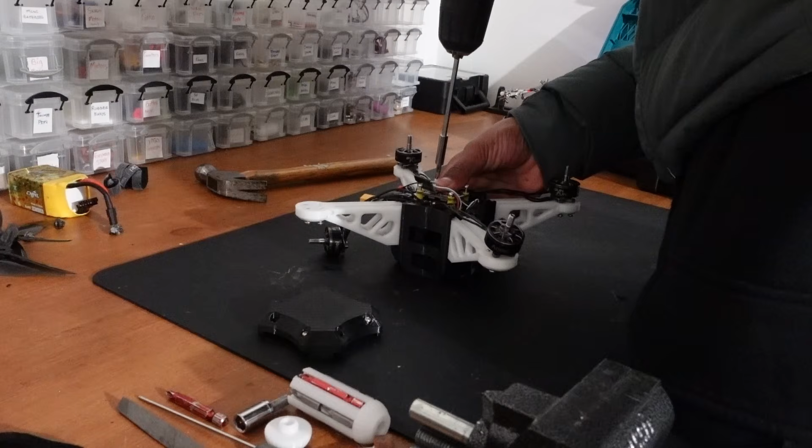This is a fully 3D printed drone that I designed from scratch, and as fun as this project has been, it definitely had its ups and its downs. In this video, I'll walk you through the full design and build process so you can make one for yourself.

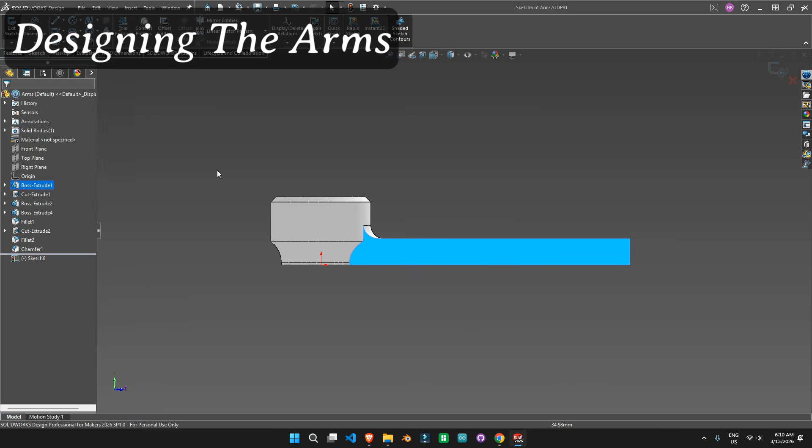I designed everything in SolidWorks, focusing on using as little hardware as possible while keeping it easy to assemble and repair. Here's a quick time lapse of the 30+ hour designing process. It's also worth mentioning that this wasn't my first prototype. I went through several earlier versions that I scrapped due to strength and stability issues.

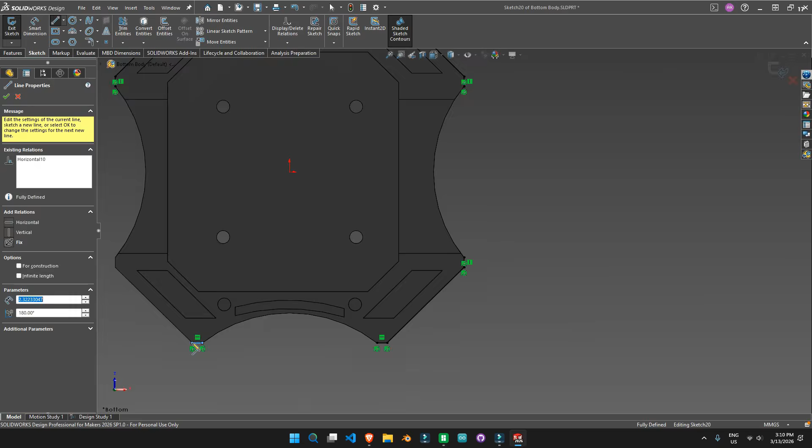The design is split into four main components. First is the hub, which everything else attaches to. I didn't compromise on its strength, since it takes on about 90% of the drone's stress and vibrations. Next is the TPU bottom brace. It holds and protects the battery from below while absorbing impacts from crashes and hard landings. This part needs to be printed in TPU so you're not reprinting it every other flight.

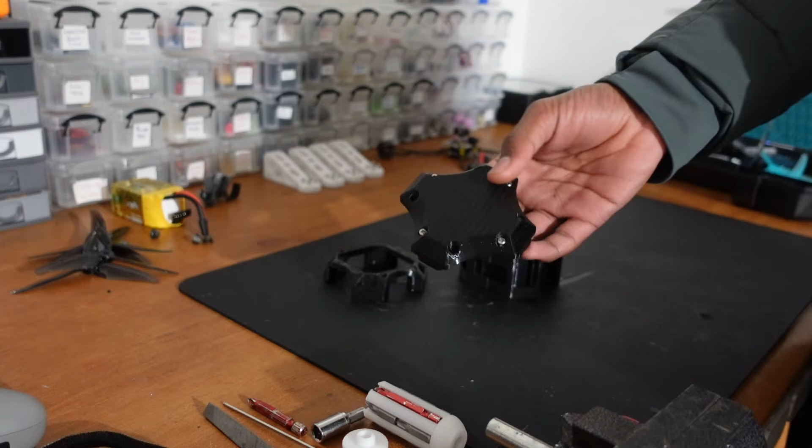Then there's the top cover. While it isn't necessary for performance, it protects your electrical components from water, snow, and dirt, while also shielding them from impacts. And finally, there's the four arms. These slot securely into the main hub without the need for any hardware. The tolerances were carefully designed to ensure they're not too tight or loose.

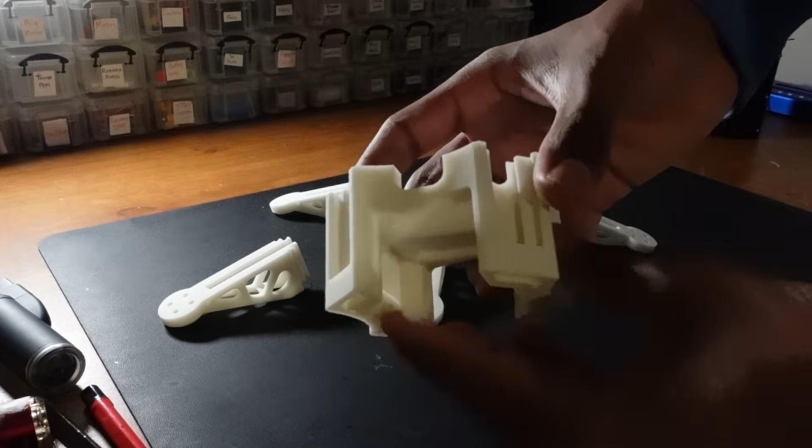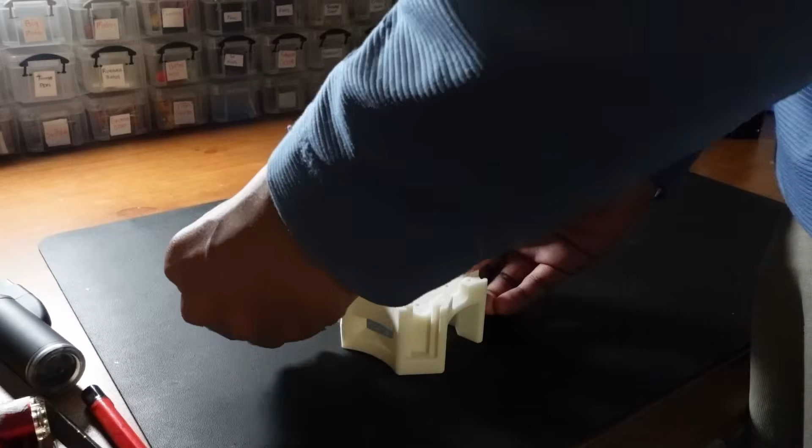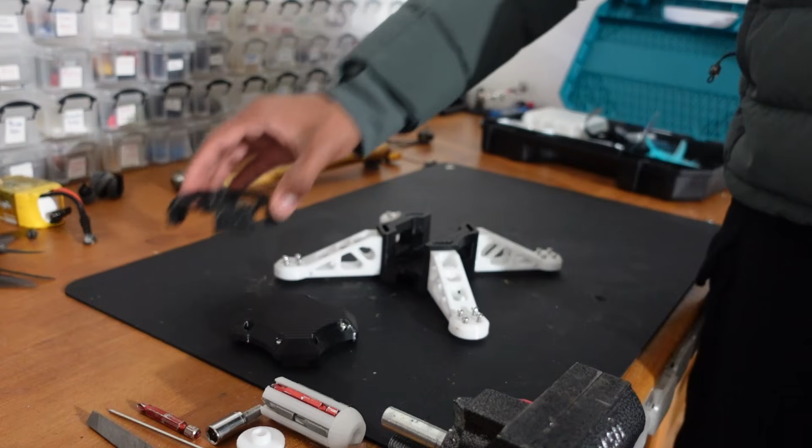Here's a quick video of how to assemble everything. Before installing the props, calibrate and configure everything in Betaflight. This is safer and helps you identify which props go where. I'll cover the configuration next.

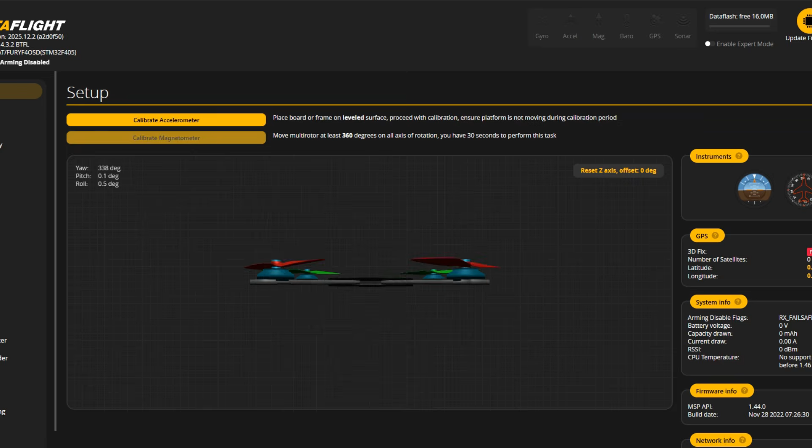The calibration process took me much longer than I expected, mainly because this was my first time building a drone. I went through multiple tutorials and documents before I could get it flying, and I highly recommend you do the same to avoid damaging your drone, and possibly saving your fingers too. Here are some of the main things you'll want to check.

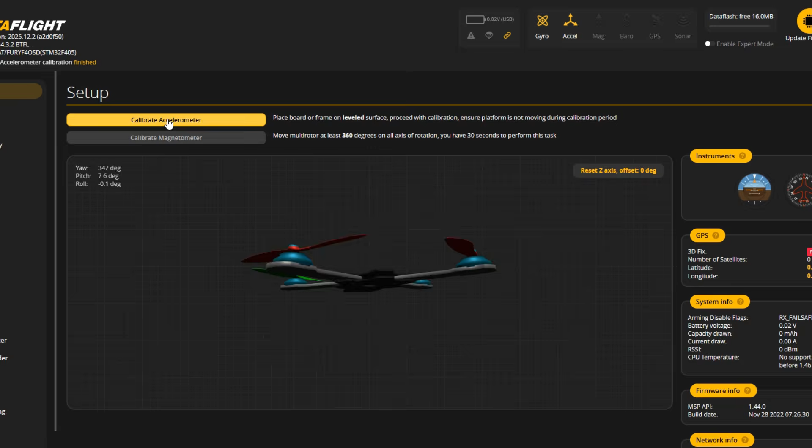Make sure your accelerometer is calibrated and that the front of your drone matches the orientation in the 3D simulation. You'll also need to configure the motor directions, with the props removed of course. I had to manually rewire 2 of the motors because my ESCs wouldn't switch directions for some reason. You should also bind your transmitter and receiver and set up arming switches.

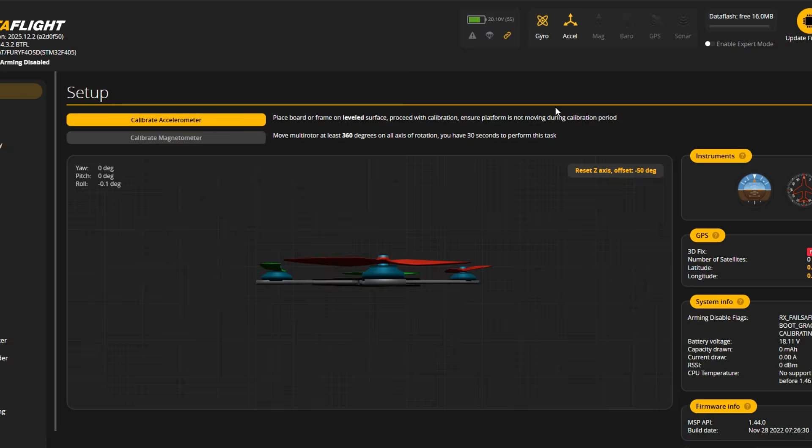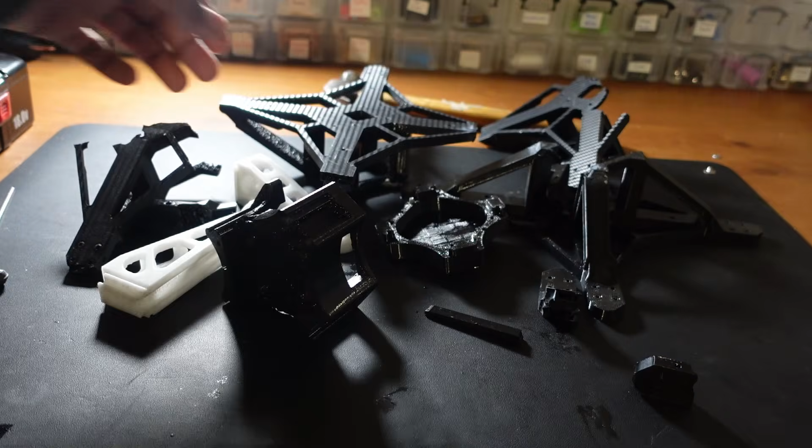If you're not using FPV, make sure your drone is set to angle mode. I also found enabling head-free mode useful. There may be other steps I've missed, so I recommend watching a few YouTube videos to make sure you've covered everything. Now you should probably be careful when doing this, but make sure that when you turn your drone in one direction, it tries to push it in the opposite. That will tell you that your gyroscope is working properly. Here are some of the previous prototype designs.

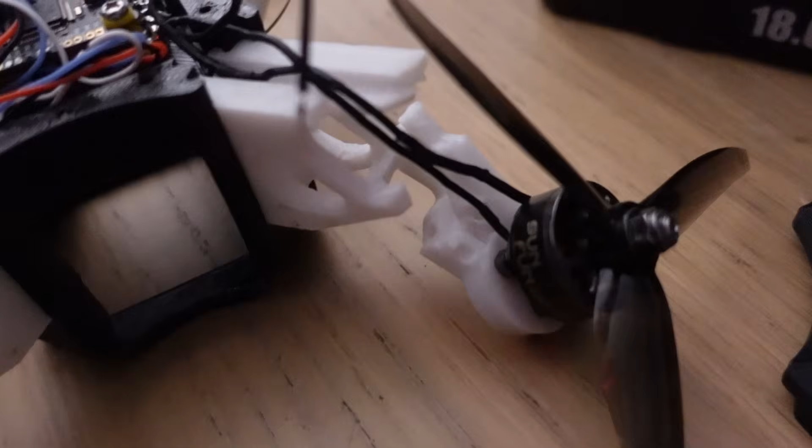Thankfully, after several hours of trying, we finally got it back. The only real damage was a broken arm and a wire that got detached from the motor windings. Despite all those failures, I eventually managed to get the drone under control and capture some pretty decent footage.

In theory, this drone should be capable of reaching speeds of up to 200 km per hour, although I don't have a GPS yet to confirm that. In my latest design, the drone is around 650 grams, reaching up to 750 with a camera on it. With the 6S LiPo, I can easily get 10 minutes of flight time.